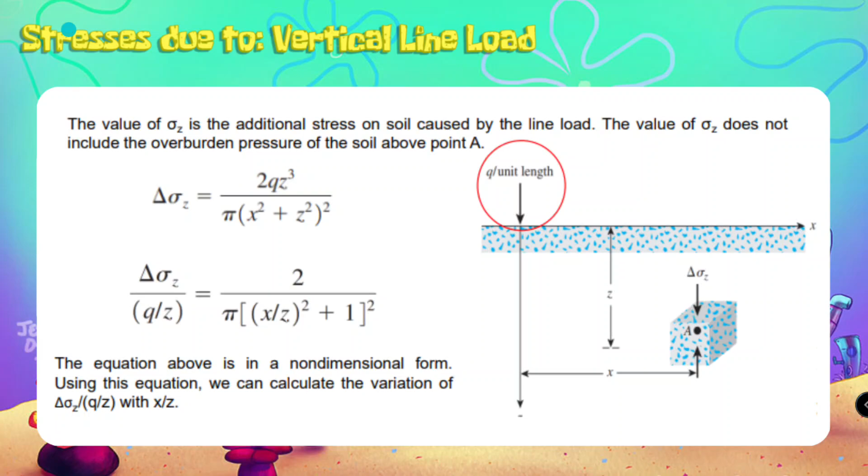So the other formula ani guys is i-divide lang nimo ang first equation by q over z, which results into this form. Change of sigma z over q over z is equal to 2 over pi times square of x over z squared plus 1. The equation above is in a non-dimensional form. Using this equation, we can calculate the variation of change of sigma z over q over z with x over z.